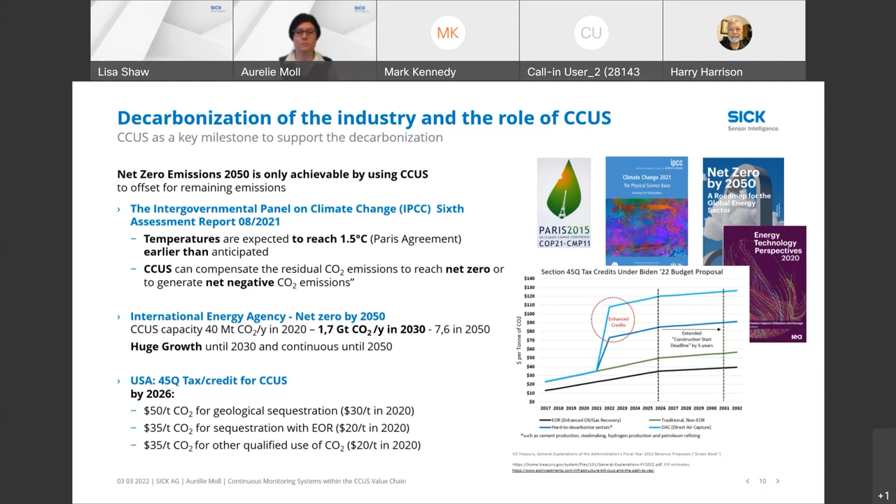Here we see the different scenarios from the IPCC report on global warming. All the scenarios show the development of anthropogenic net CO2 emission, and that the pathways to limit global warming to 1.5 degrees Celsius plan the use of carbon capture with a level of 100 to 1,000 gigatons CO2 until the end of the century.

Yes, as said before, CCUS will be used to offset remaining emissions and also to achieve net negative emission. For example, with BECCS, bioenergy with removal of CO2.

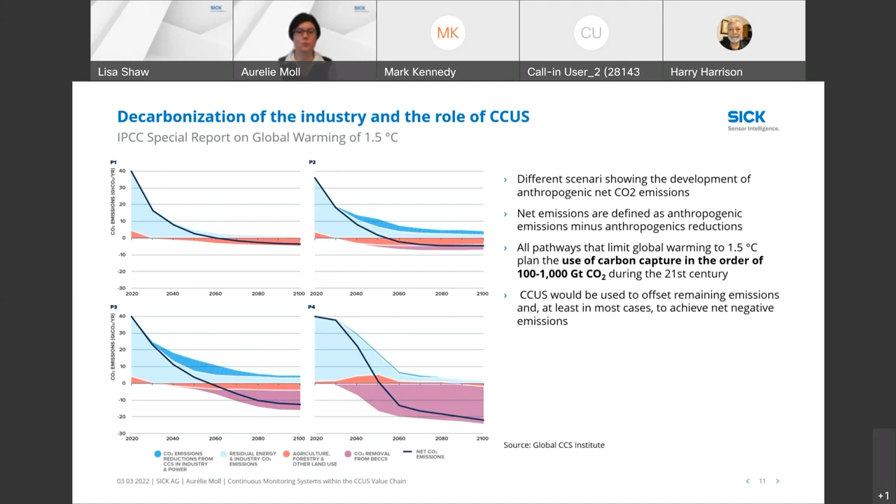This is an extract from the IEA report, and it provides the estimation of the required CCUS capacity to reach the climate target shared by industry sectors. Here we see that the main sectors where CCUS will be needed are the fuel supply with hydrogen production and biofuels, industry with the combustion processes and the production processes, and there is as well a new application for CCUS, which will grow in the next years, the direct air capture, where the CO2 is directly removed from the atmosphere.

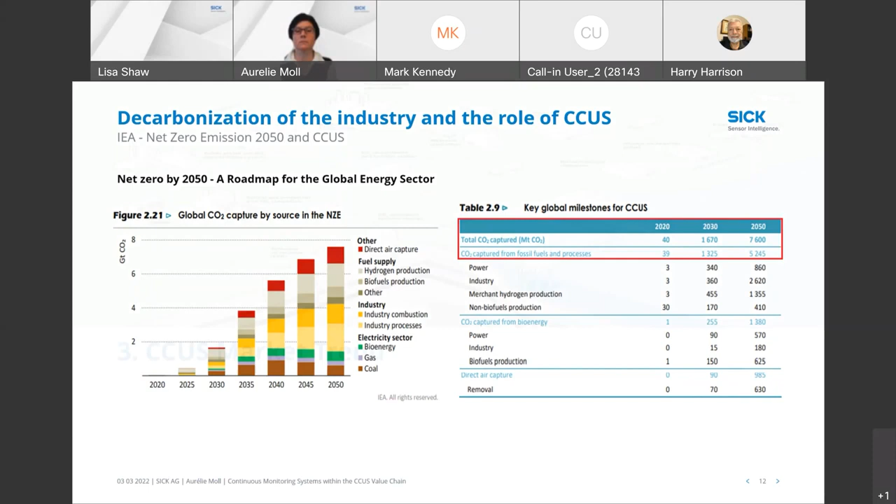In fact, to enhance the development of CCUS in industrial areas, so-called hubs or clusters are created. That means that different companies in an industrial area are collecting their CO2 to have a common transfer for utilization or storage. And this kind of network brings some advantages, like the proximity of industrial emitters, the common use of existing infrastructure, for example, pipelines, the construction of new common infrastructure. So at last this leads to cost optimization of CCUS projects.

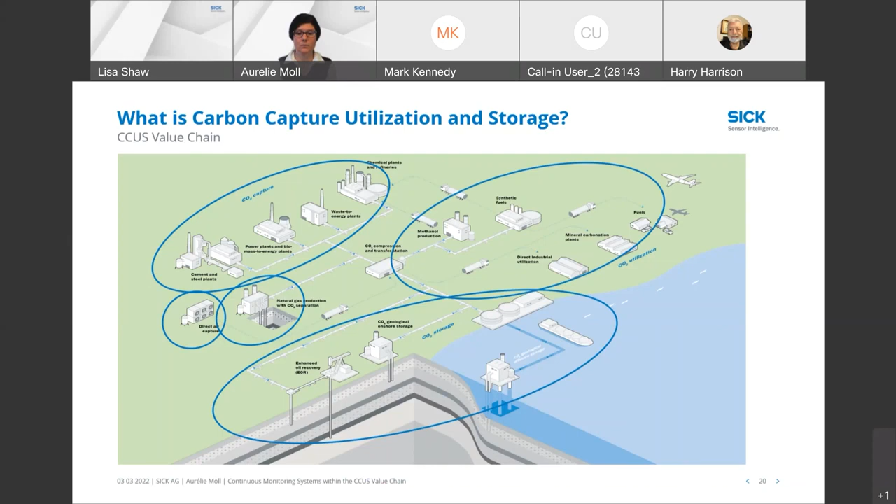There are three main processes to capture the CO2. The pre-combustion process, used, for example, for hydrogen production with a steam methane reformer. The post-combustion process, which can be seen as a part of the flue gas treatment and can be retrofitted to each industrial plant. And the oxy-fuel combustion process, which involves pure oxygen instead of air and provides nearly pure CO2 after condensation of the water.

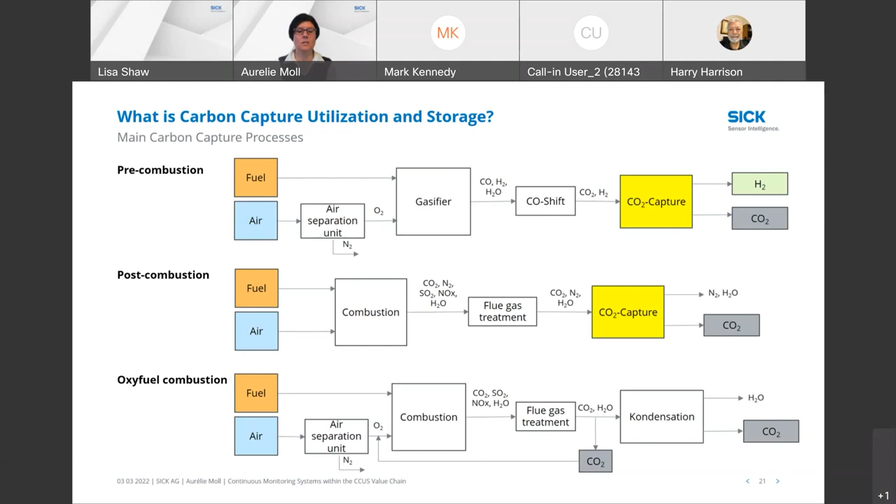There is a further carbon separation process specific to the cement industry, where the unavoidable CO2 coming from the limestone is directly separated. Here you can see the example of the Leilac pilot project in Belgium. Approximately half of the CO2 emissions from cement are process-related and come from the limestone. The limestone releases the CO2 during the calcination process. So this process offers a way to directly capture this unavoidable gas stream as almost pure CO2.

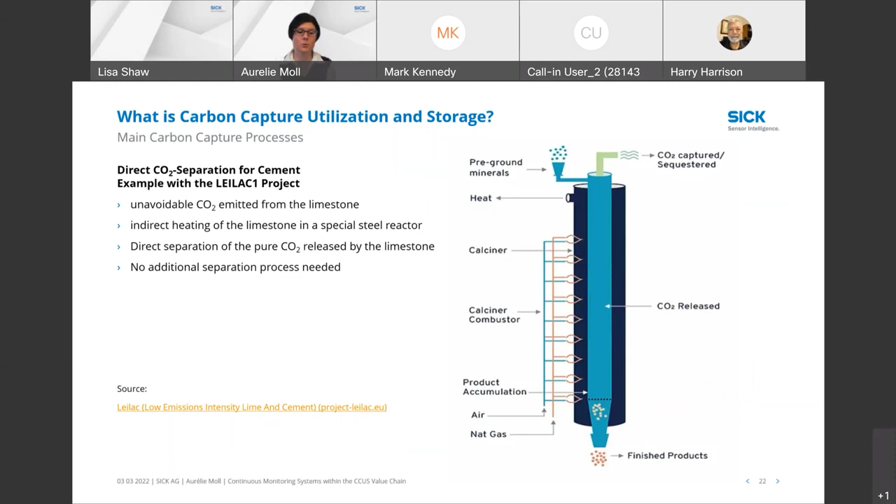This is an overview of the main utilizations of CO2, the main possibilities. The first one, the most important, is chemical conversion to produce polymers and, with the use of hydrogen, to produce fuels, chemicals, and commodities. As said before, methanol is, for example, an interesting feedstock for the chemical industry, and synthetic gas can be used to produce kerosene. There is a mineralization process to produce construction material and carbonates based on CO2.

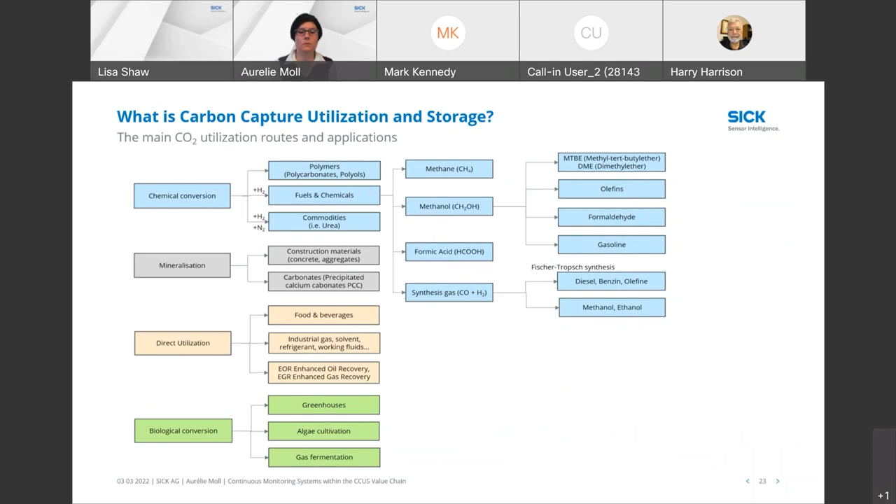There are several direct utilizations for food and beverage or as industrial fluid. And CO2 can also be used with a biological conversion, for example, in greenhouses to support the growth of tomatoes. Regarding the sequestration of CO2, you can see here the different possibilities with injection deep underground, onshore or offshore, for example, in saline formations, in unmineable coal seams, for enhanced oil recovery, or in depleted oil and gas reservoirs.

With our existing product portfolio, we can propose solutions for most applications within the CCUS value chain. The continuous gas analyzers are used to measure the CO2 concentration, to control the efficiency of the capture process, and to calculate the exact amount of the removed CO2. The gas analyzers are also important for quality control, to measure the concentration of other components that are considered impurities and can have an influence on the further steps within the value chain, for example, corrosion.

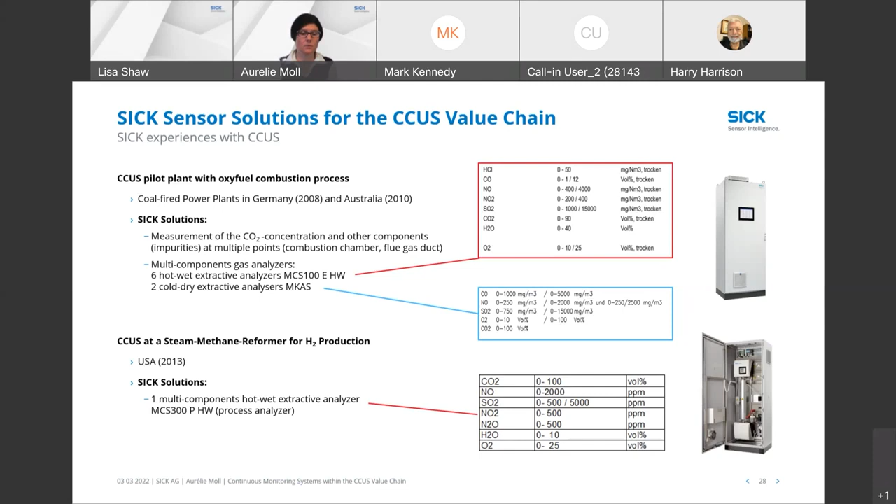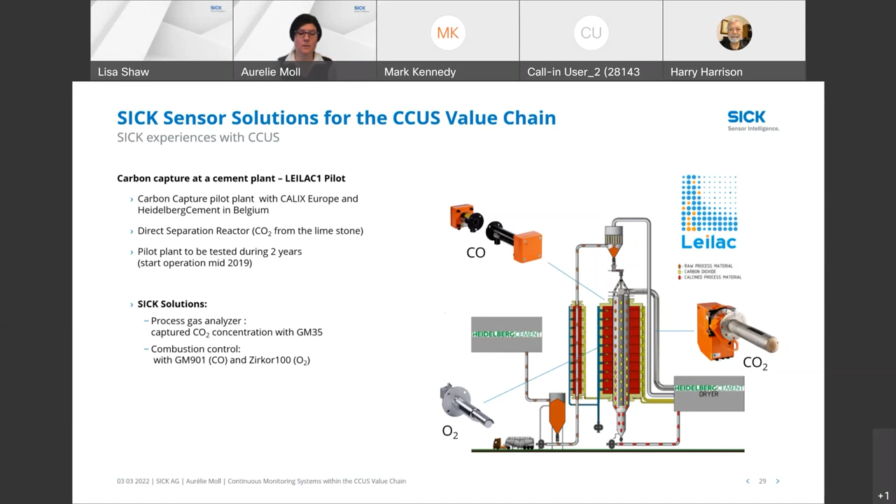Along the CCUS value chain, flow metering is essential to control the exact quantity of carbon dioxide transferred for storage or utilization. It will become more and more important when it comes to CCUS networks, where several companies are involved, so several interfaces. It is important to invoice the CO2, to report the amount of removed CO2, and also to claim for tax and credits.

But CO2 is not so easy to measure as natural gas. In fact, CO2 has an attenuating effect on the ultrasonic signals, and the speed of sound in carbon dioxide varies strongly depending on the pressure, temperature, or gas phase. So that's why the flow meter for CO2 applications has to be specifically adapted regarding the design parameters. Especially the probe frequency has to be adapted, and the presence of other gases is taken into account during calibrations. Considering all these parameters, SICK has an optimal solution with a high precision up to 100% of CO2.

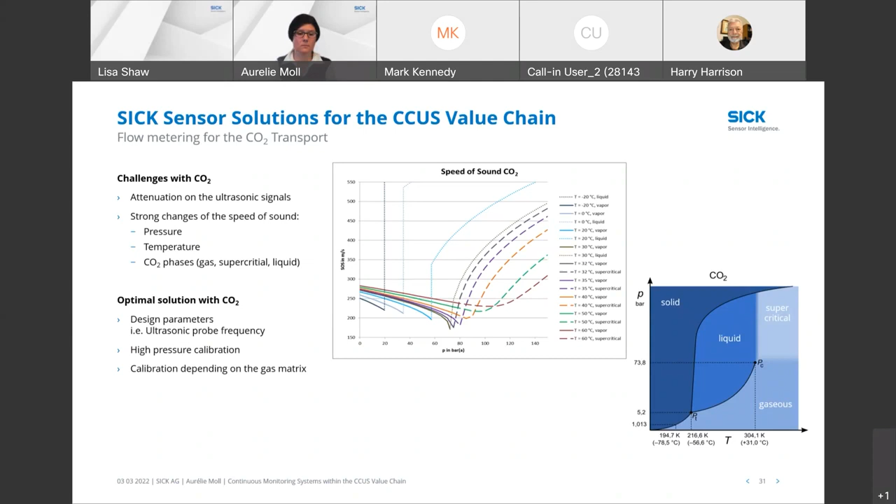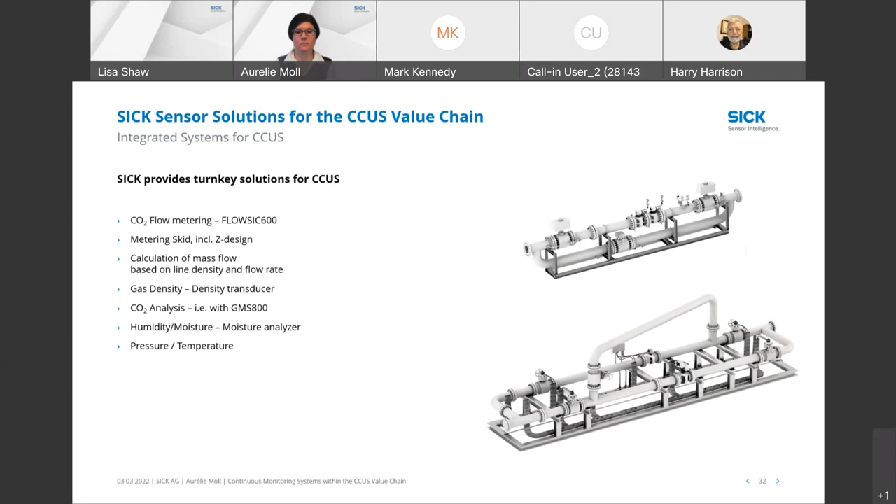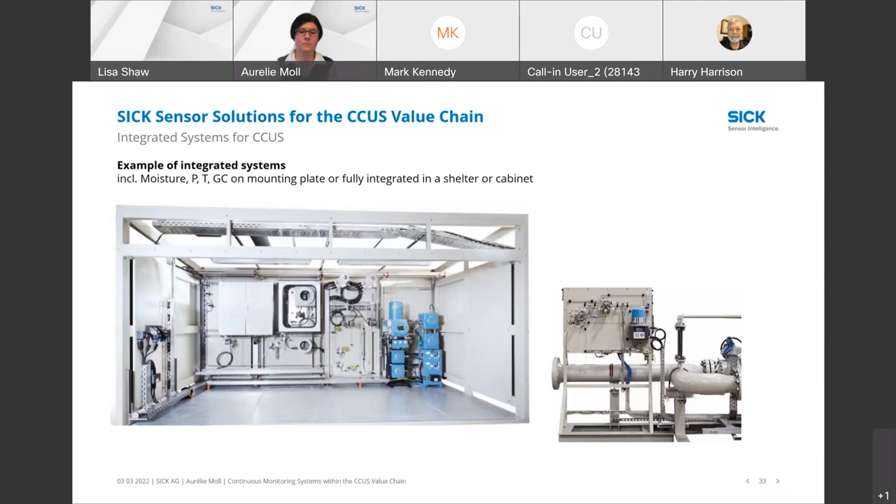As an example, SICK supplies customized turnkey systems for CCUS. Here we see a metering skid with our flow meter, FLOWSIC600, as the heart of the system. We have here also the integration of our analyzers as well as third-party instruments depending on the specification. And the data handling is also part of our solution. This is an example of a fully integrated analyzer shelter we provide. And here some metering skids, in this case for natural gas, but they look similar for CO2.

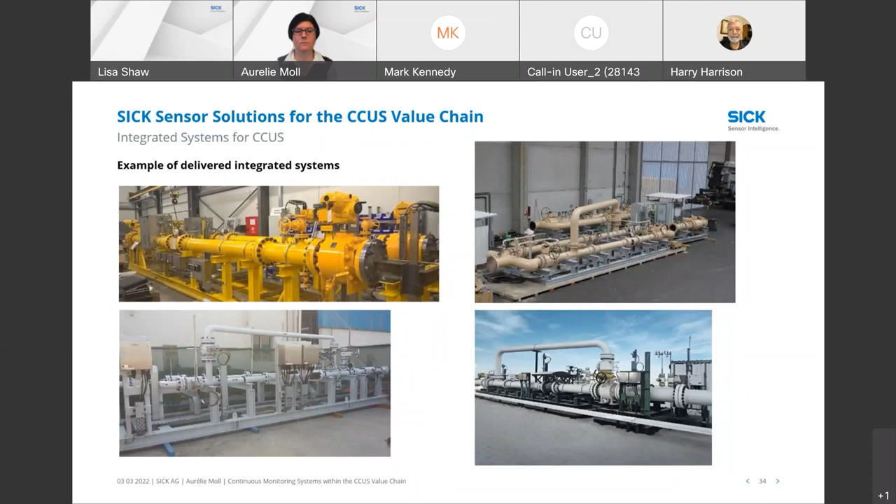So to conclude, we can say that in addition to the development of renewable energies, CCUS is a key element to achieve the high CO2 reduction targets. With CCUS, the CO2 emission of energy production from fossil sources can be significantly reduced. CCUS can also make a major contribution in CO2 intensive industries such as cement, metal and steel, as well as petrochemicals. And CCUS is also important for clean gas production, like blue hydrogen.

Continuous measuring systems are required to control the efficiency of the processes, the quality of the gas, and to measure the flow of carbon dioxide within the CCUS value chain. The challenge for the continuous measuring systems is the diversity of processes and the different operating conditions along this CCUS value chain. But there are currently measuring systems or measuring devices that can be used for CCUS with less or no adjustments.

Finally, the design and the development for measuring systems will have to be compliant to future regulations and performance requirements, for example, for fiscal measurement. But for all the emitting industries, SICK already provides solutions for almost all measuring applications and will also support the CCUS development with suitable gas analyzers and flow meters.